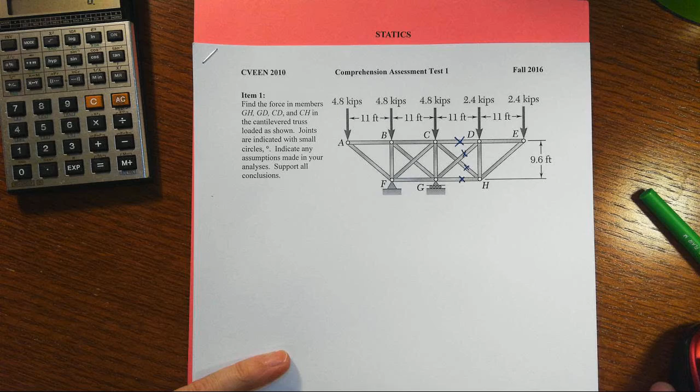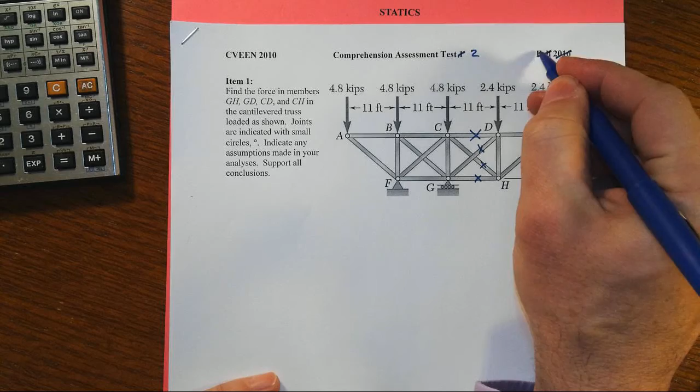This is the first item on our second test of spring 2017. I used the same headers as a previous test, but totally different problems.

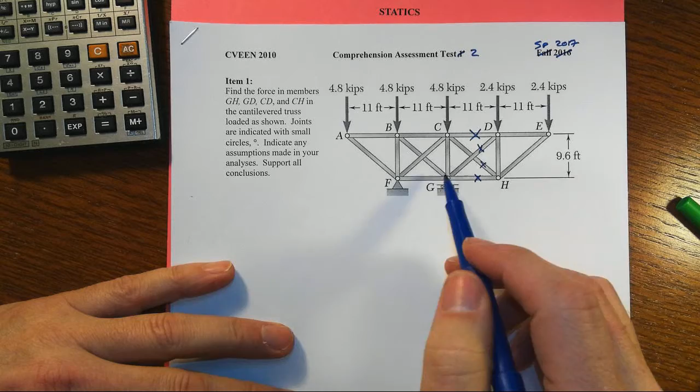We have a truss that has a whole series of vertical loads, probably representing gravity loads, and note that we have a cantilevered segment of the truss. Here's a support pin at F and a support roller at G.

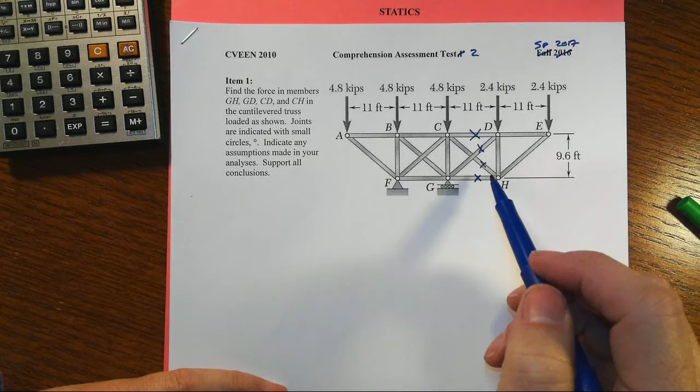We're asked to find the member forces in these four members through this one particular panel or section of the truss. That should be an indication right off the bat that something a little bit different is going on here. Four forces, but we only really have three equations of equilibrium to work with as we cut through that particular one panel.

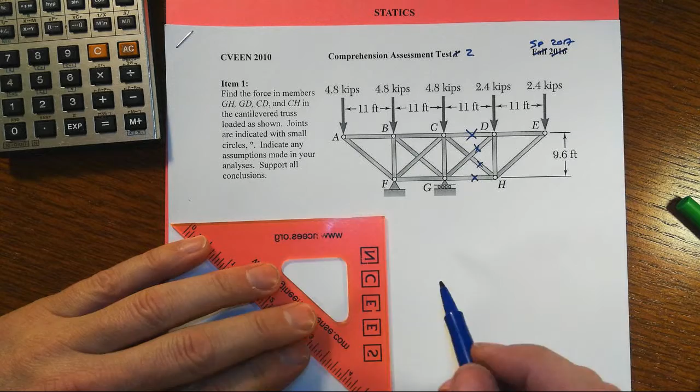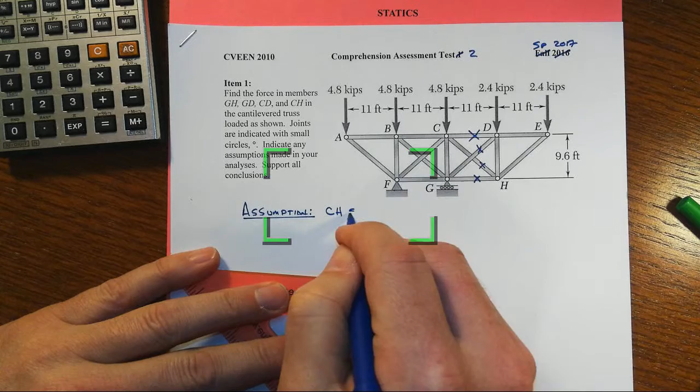We've talked about this before, that when you have the situation of an X where two members overlay each other, there is no connection there. You have to start asking yourself, are those potentially tension counters? That's got to be our basic assumption in this problem, that CH and GD are tension counters.

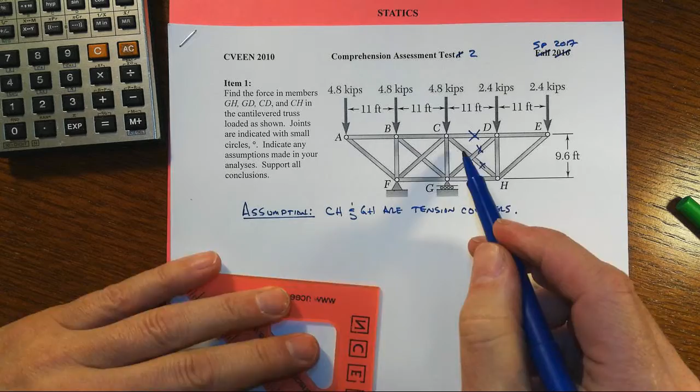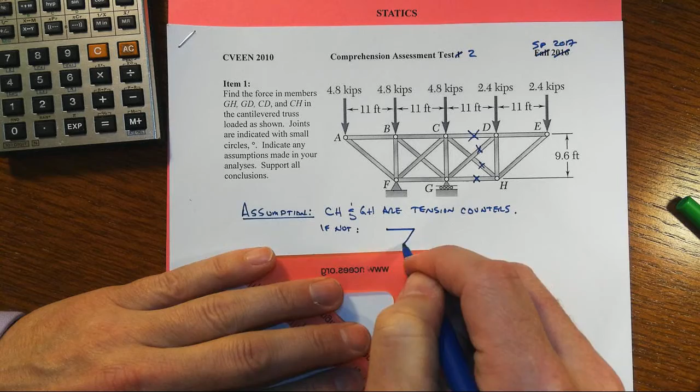Unfortunately we don't have any information about the size of the members that would indicate that, but if they're not tension counters, then we would have a situation with 1, 2, 3, 4 unknowns and only 3 equations of equilibrium, and that would be a statically indeterminate problem.

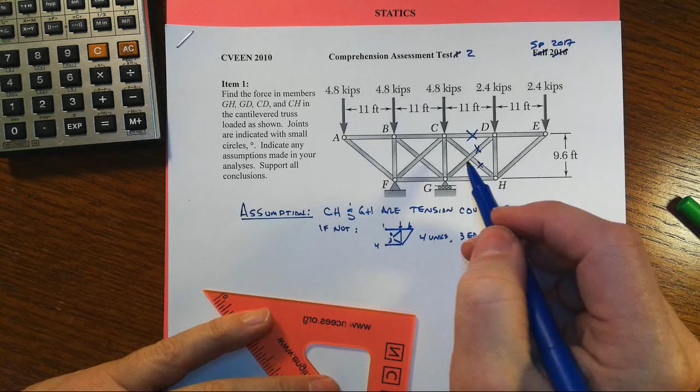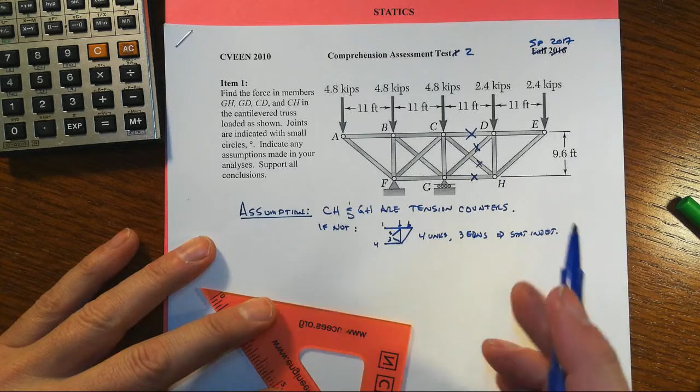So in statics, we don't have any choice in this case but to either assume that there's a connection here, which would change the problem and make it feasible for us, or to assume that we've got tension counters. And since we're told that they are overlaid, there is no joint there, and therefore we really have to assume that there are tension counters.

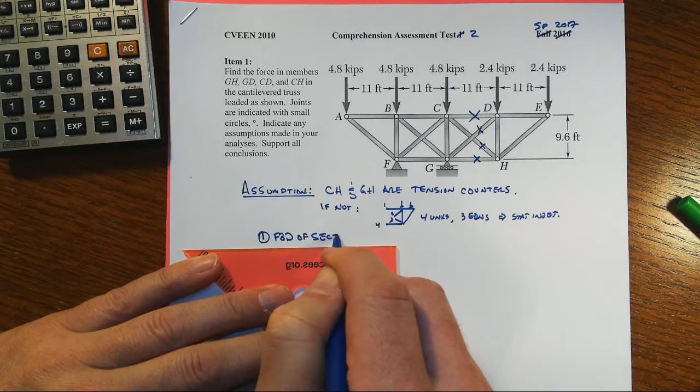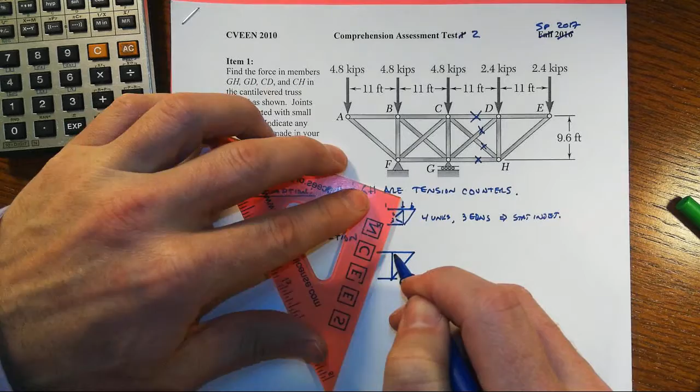So that free body diagram that I drew real quickly serves as our first step here. Let's draw that free body diagram in a slightly larger scale, where we haven't presumed which member is in compression and which member is in tension yet. Let's see if we can figure out what might be going on.

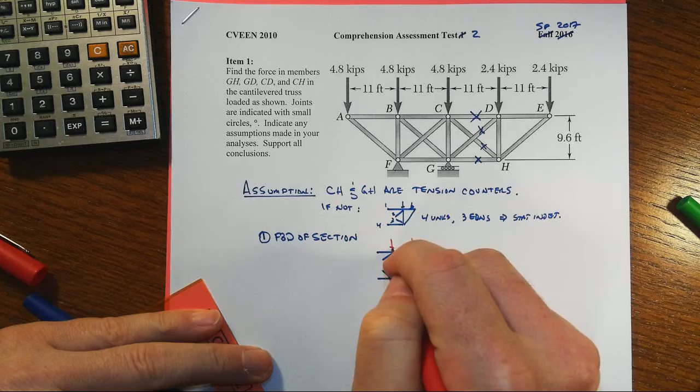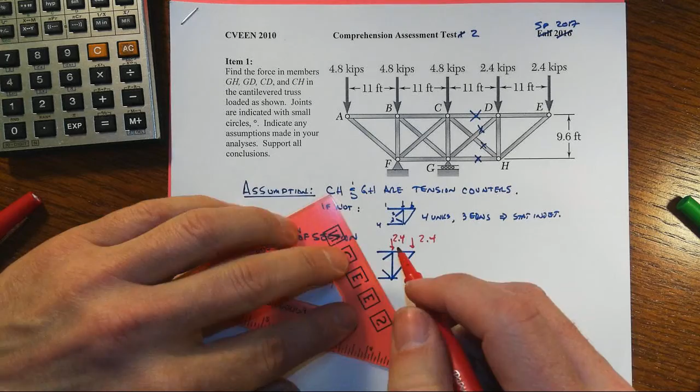There's our two point loads that have been imposed, and note that the panel shear here is going to have to clearly be going up. It's also going to be of magnitude 4.8 kips, and as such that would mean that would drag this diagonal along with it, put it in tension, and it would put the other one into compression. That would be GD, and the other one would be CH.

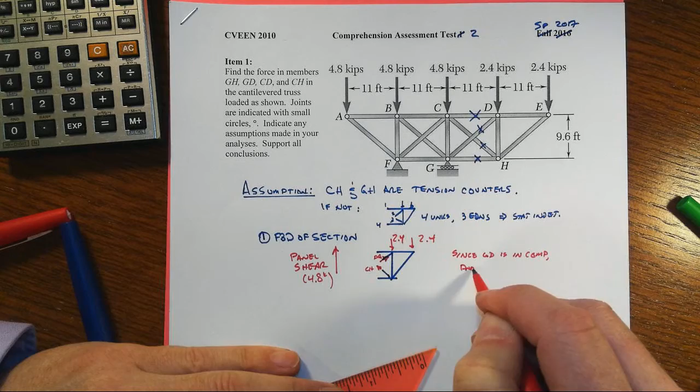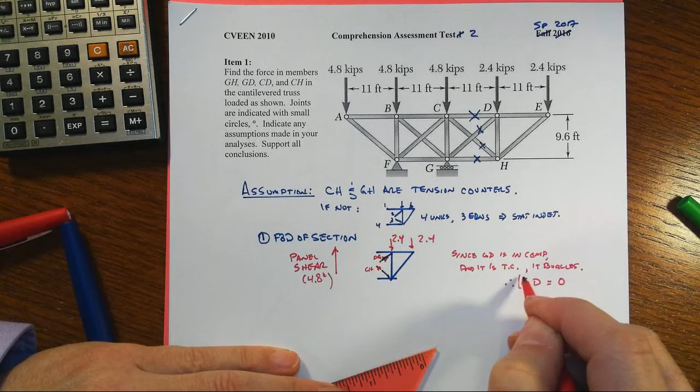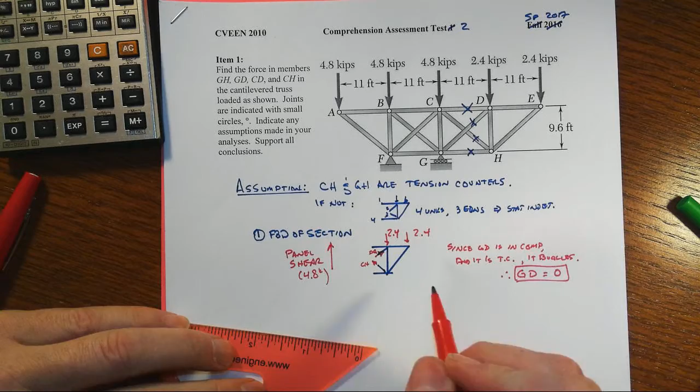And since GD is in compression and it is a tension counter, it buckles, and therefore GD would be a zero force member in this particular case. Not because of the equilibrium, but rather because being a tension counter means it's long and skinny, and we're going to presume at this stage of our analysis that it buckles.

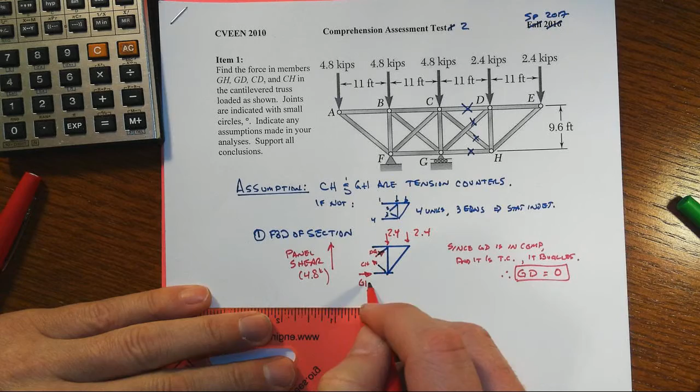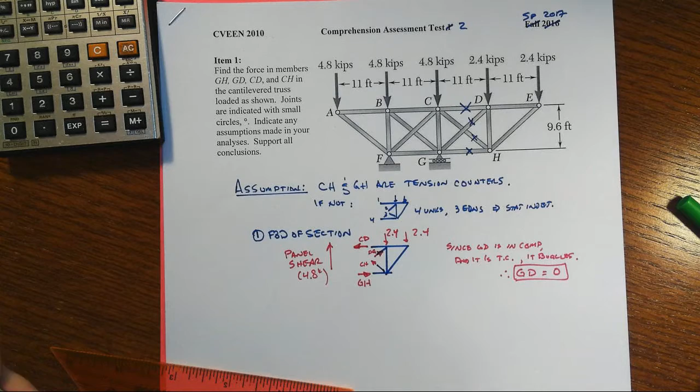And then we'll presume here that GH down at the bottom is in compression, and we'll presume or assume that CD at the top is in tension. The math here will demonstrate to us in just a moment that that is correct.

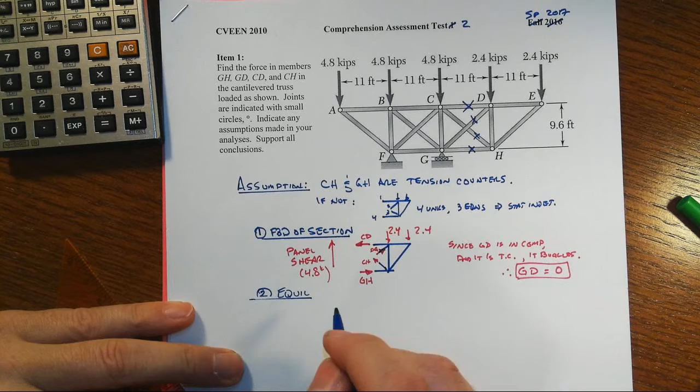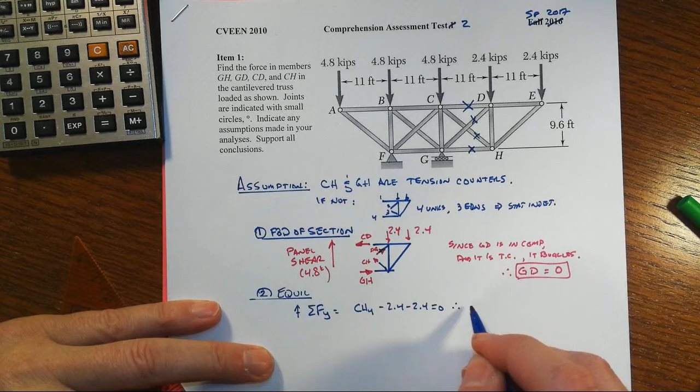And that math, of course, would be our equilibrium equations. If we sum forces in the Y, taking upwards positive, we'll have the Y component of the diagonal minus 2.4 minus 2.4 equal to 0, so therefore that Y component equals 4.8, that'd be the panel shear.

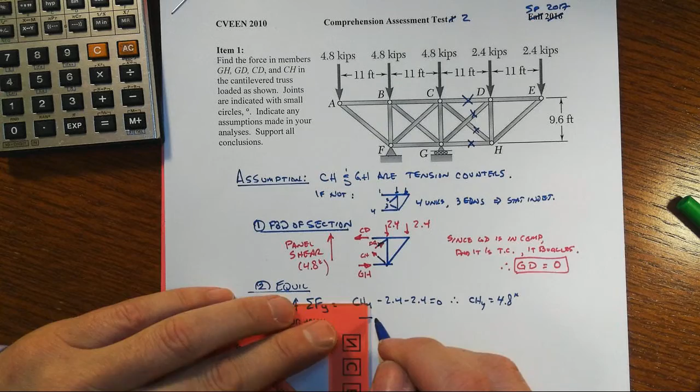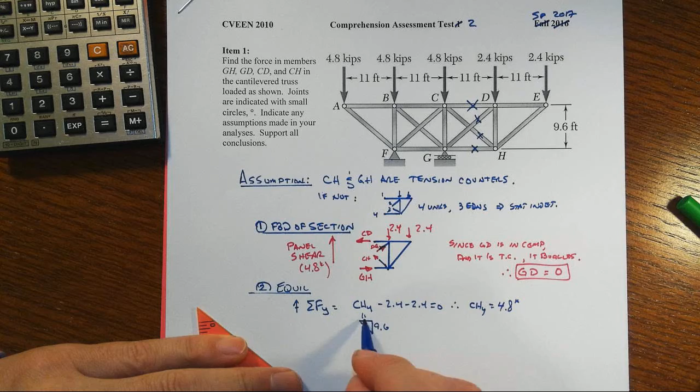And then note that the geometry of that triangle is such that it's 9.6 high, 11 side to side, and the square root of the sum of the squares turns out to be 14.6 on the hypotenuse. So note here, plus means that we guessed correctly the direction, that direction is tension, so we guessed all of that correct.

CH equals then the whole magnitude, 14.6 over 9.6 - that's the hypotenuse over the vertical, the component we had found - times 4.8, and that would be equal to 7.3 kips. Again plus as shown, therefore tension as shown, and CH equals 7.3 kips.

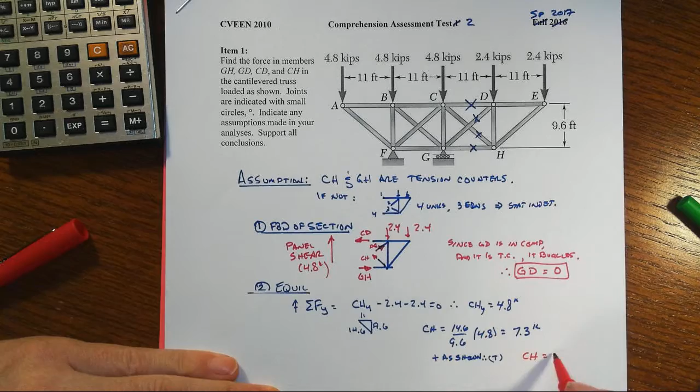So that's one of them. We still have the top chord, bottom chord ones to do, and in classic fashion we would do those by summing moments about some joints here.

If we go down here to H, we'll get rid of CH and GH. Let's take counterclockwise as positive. We'll have CD times its moment arm, that's the height of the truss. Then the 2.4 goes through, DG is 0, CH goes through, GH goes through, so we just have the 2.4 out at E, its moment arm is 11, set it equal to 0.

And therefore CD will equal 2.75 kips, plus as shown is tension, so we end up with an answer of 2.75 kips of tension.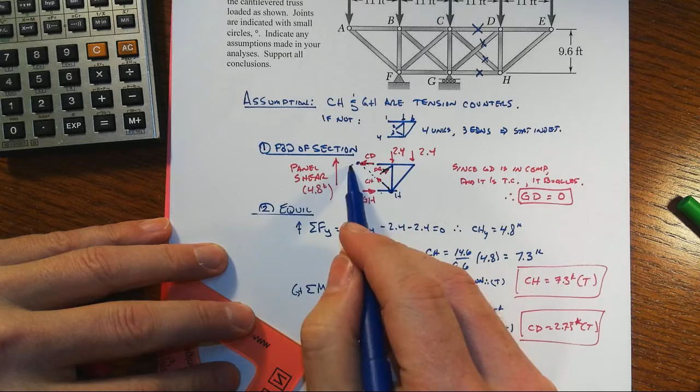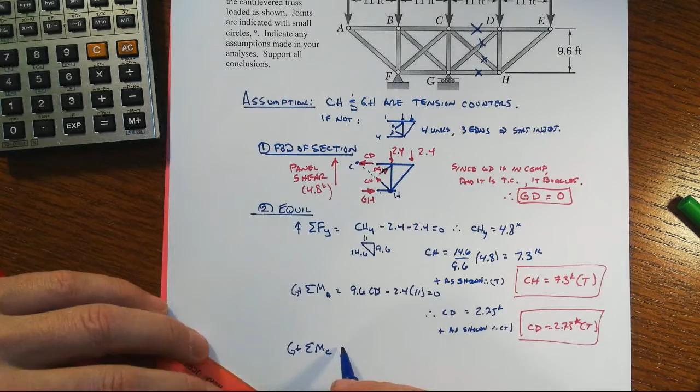And one more. We'll sum moments about point C, getting rid of CD and CH, DG again is 0, so we don't have to worry about that. We'll take counterclockwise as positive once again, and then we'd have the height of the truss as the moment arm, so 9.6 GH minus 2.4 times 11 minus 2.4 times 22, set it equal to 0 for equilibrium.

Therefore GH will equal 8.25 kips, plus as shown, and as shown this time is compression, so therefore GH equals 8.25 kips compression.

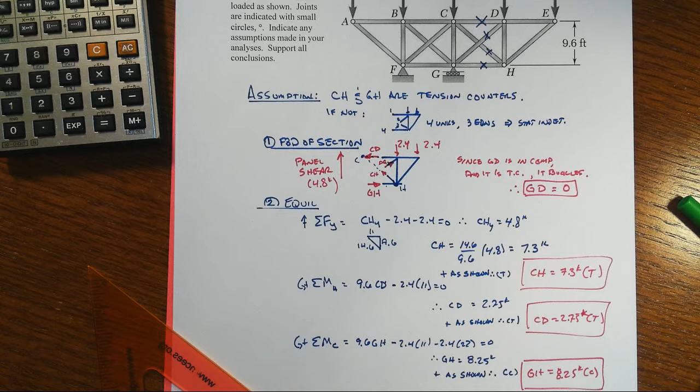So let's summarize real quick here. The key is recognizing that we have tension counters here and here, and then following that up with the fact that one of those must buckle when in compression, basically having no resistance to any compressive force. That's what enables us to have a statically determinate problem where we can execute these steps that you see down below.